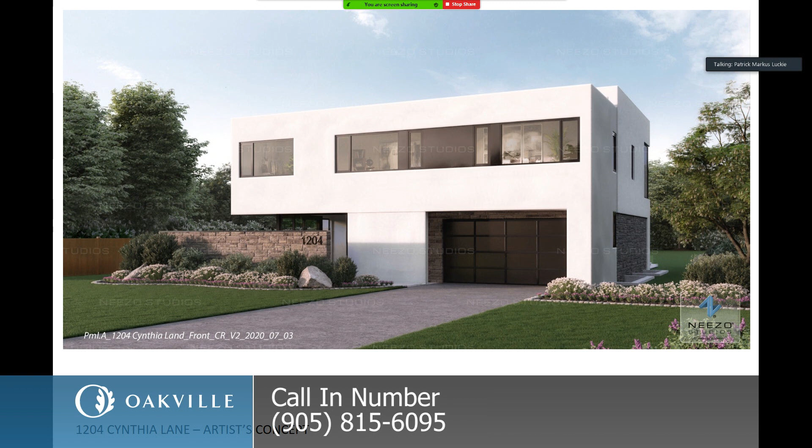This is a very contemporary design, which is a purpose-built project specifically for the property owner, and this design is very similar to the design he had approved back in 2016. It was under a different architect at that time, but we've taken over the project and essentially incorporated some of the same elements from the previous approved design.

If you can go to the next slide - this is just the site plan showing the location. It's a complete rebuild. There's an existing in-ground pool at the backyard that's trying to be retained.

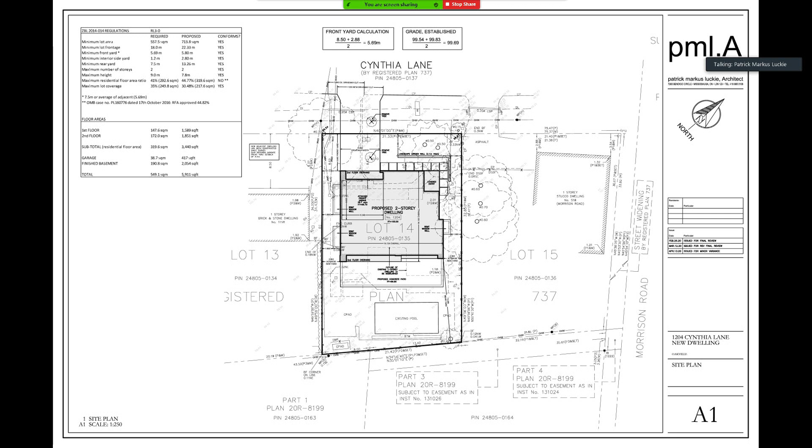Next slide, please. This is an overlay of the 2016 building outline - essentially a very similar shape and footprint. However, we decided to move the building a little bit closer to the front lot line, as the adjacent property to the left on the screen, since the 2016 approval, constructed a new 2-story dwelling closer to the lot line than what they had previously. So given the averages, we were able to move the building a little closer to the front lot line and give a little more relief to the rear yard.

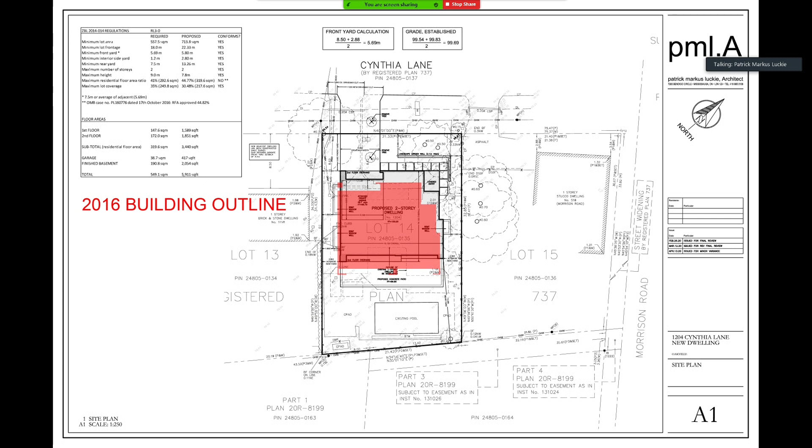Next slide, please. These are just the ground floor plans - this is the proposed one. Next slide, please - and just the 2016 approval. That's the second floor. Next slide, please - and again the 2016 outline, which is almost virtually identical.

Next slide, please. This is the front elevation. The materials are shown as a combination of white stucco and stone. However, the owner, now that we're doing some further investigation, might be looking at doing some aluminum composite panels as opposed to stucco. But the same contemporary kind of white look is his desired taste.

Next slide, please. This is just an overlay of the 2016 building outline. The 2016 design had this kind of strange butterfly roof that sloped towards the back and sloped towards the front - you'll see it in the side elevation. The owners decided to eliminate that concept.

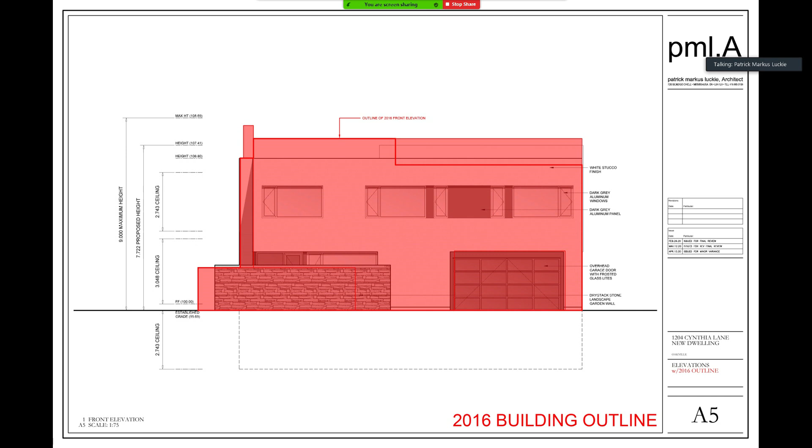Next slide, please. So this is one of the side elevations, just showing the combination of glass, stone, and white stucco or white panels. Next slide, please - and this gives you an idea of that previously approved butterfly roof that has been revised in this application. Still maintains the height well under the maximum 9 meters - we're at 7.7 meters.

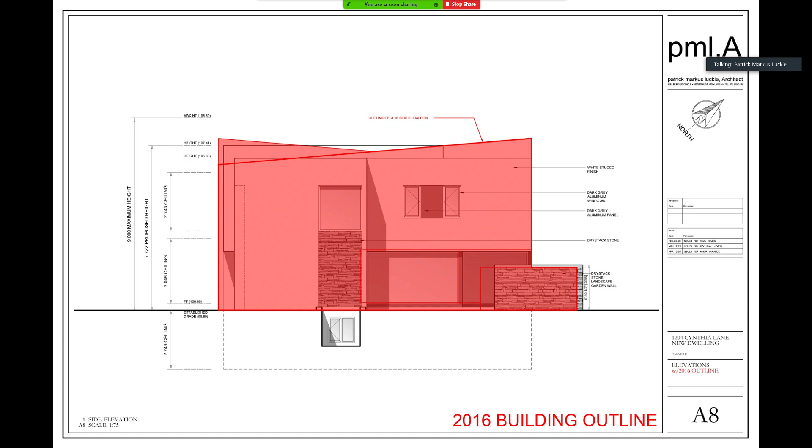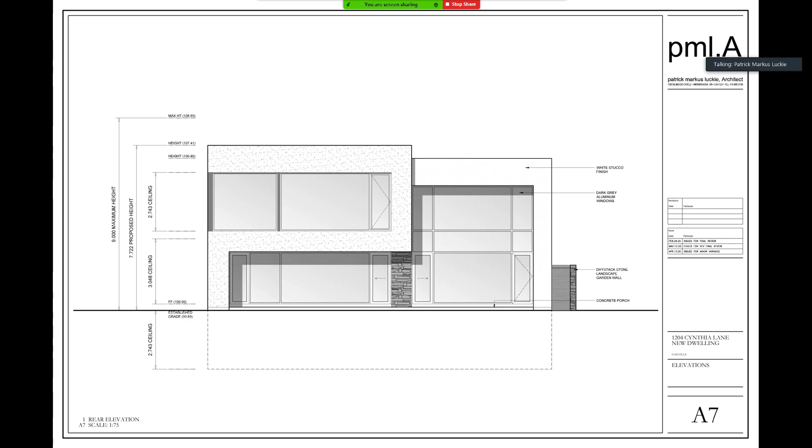Next, please. And then I just continued with the other side elevation. Those are obviously window wells into the basement, which are contained within the prescribed setbacks. Next slide, please - and the rear elevation, which is predominantly glass, overlooking the backyard in-ground pool.

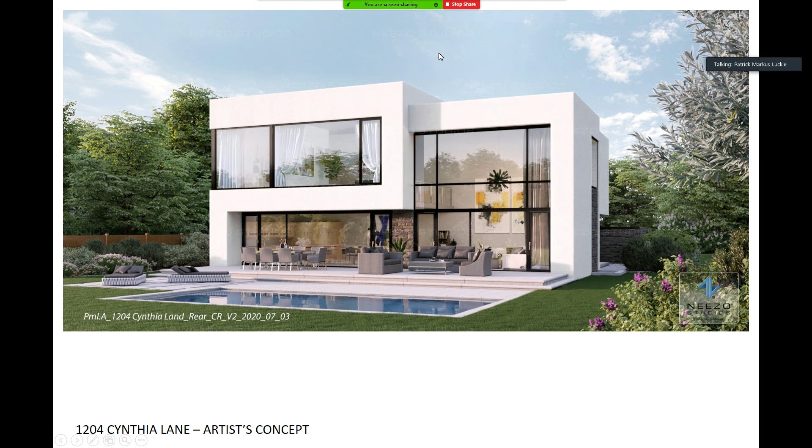So if you could go back to the first slide, that was the three-dimensional of the front elevation. That's it. So the garage is set back a little bit from the main front of the building - the front garage door is set back about 1 to 1.5 meters.

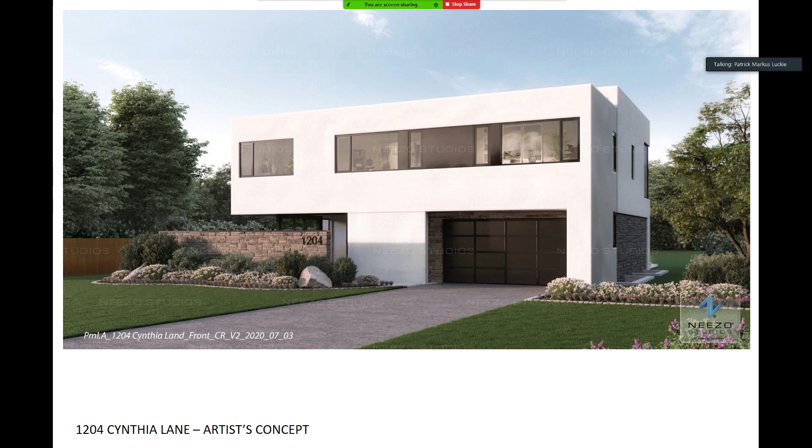And the front setback proposed is 5.8 meters right now, and that's a little bit more than the average of the two adjacent dwellings.

And that's it for my presentation. Thanks.

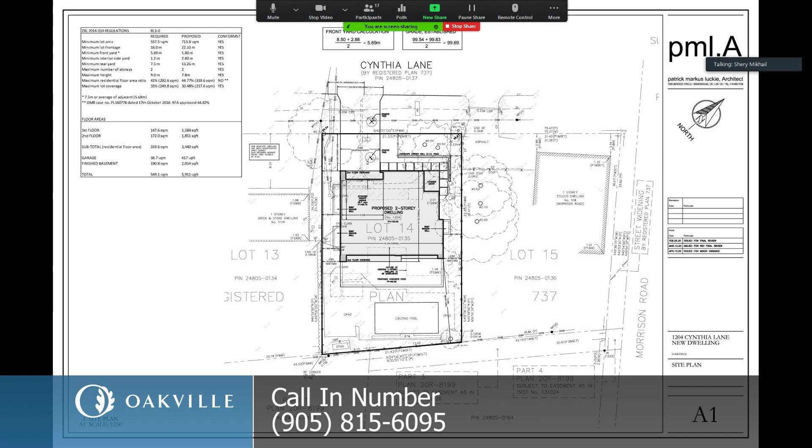Very well, thank you. Members, are there any further questions or items of clarification at this time? Okay, I see none. If we haven't received any calls by now, we can take this matter into committee. Can we just confirm we haven't received any phone calls up to now? Okay, perfect. So if you're satisfied, we're ready to take the matter into committee.

Thank you, Madam Chair. First of all, I'd like to thank the applicant for providing the renderings. I find the style of house particularly helpful, both for the committee and the community, to be able to visualize what's being proposed. Having said that, I'd move that this application be approved as applied for, finding that it meets the 4 tests of the Planning Act. I think it's very consistent with the various styles and sizes of houses being built on Cynthia and Morrison in the immediate area. I would note there's no opposition from the public on this file, and I would make that approval subject to 2 conditions: that development proceed in general accordance with the drawings dated April 13th, 2020, and that a building permit issue within 2 years.

Very well, thank you. Is there a discussion on this recommendation? I see none. All those in support? None opposed. Thank you, your application has been approved. Thank you, have a good night. You as well.

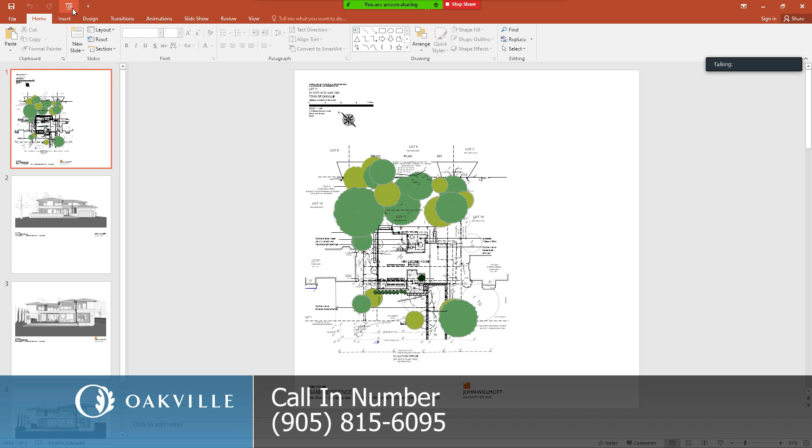Certainly. So basically, we're seeking two variances.

The first variance is for an increase in the residential floor area ratio. We're requesting a ratio of 32.5%, 2.26% of which is to permit the enclosure of an outdoor ground floor one-story patio space with a folding glass door system.

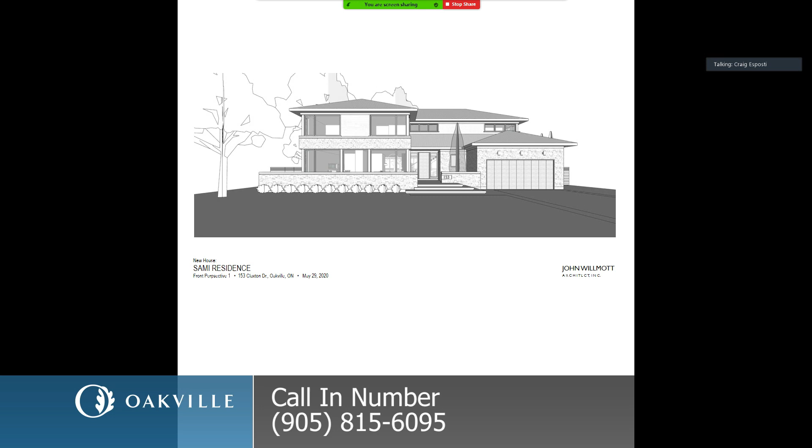If you could go to the next slide, I think it shows in the rear. You can see that it's open with a one-story covered area over the patio. And I believe the next slide should show it closed, so you can see the difference between open and closed, but having little impact either way in terms of coverage or impact on the neighbors, as it's centrally located and largely bound on three sides by the walls of the dwelling, concealing the view from neighboring properties.

The remaining 1.24% is to allow for a modest increase in floor area for desired interior spaces. We made an effort to keep the lot coverage down and keep the setbacks maintained to help mitigate any impact on the neighboring properties. The second variance is for an increase in the garage area.

That's to permit a tandem space, which is generally internal to the dwelling. It's accessed from a two-car garage door from the street and doesn't really contribute to the garage as a dominant feature in any way. We feel that those are minor and appropriate development for the site, and I'd be happy to answer any questions of the committee members.

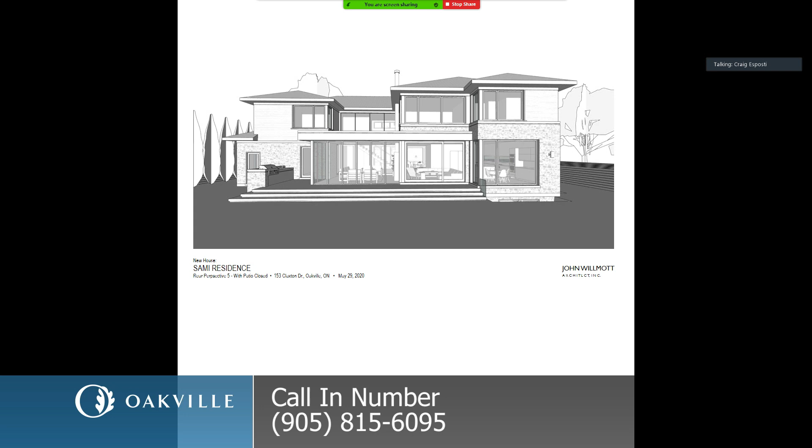Very well. Thank you, Mr. Esposti. Members, are there any items of clarification or questions? Ms. Murray, go ahead.

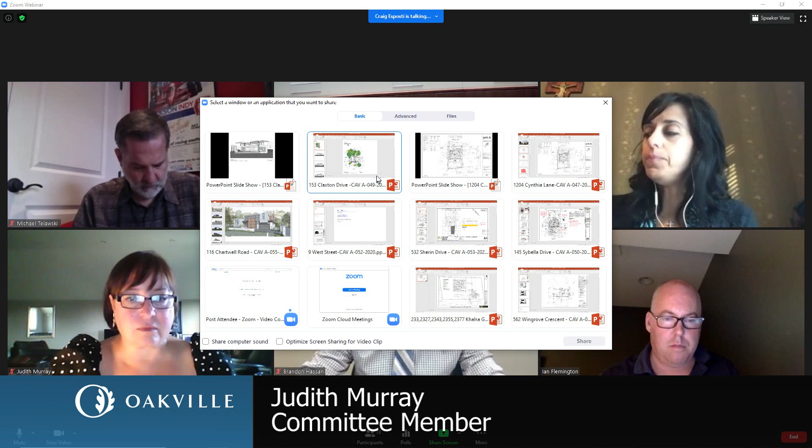Just wondering if we could see a picture of the garage, please, and thank you. Of the garage in floor plan or in elevation? If you can pull the elevation back up, there's the front perspective view, showed it from the street.

Did the previous, there it is. Thank you. It's a two-car garage door, single door.

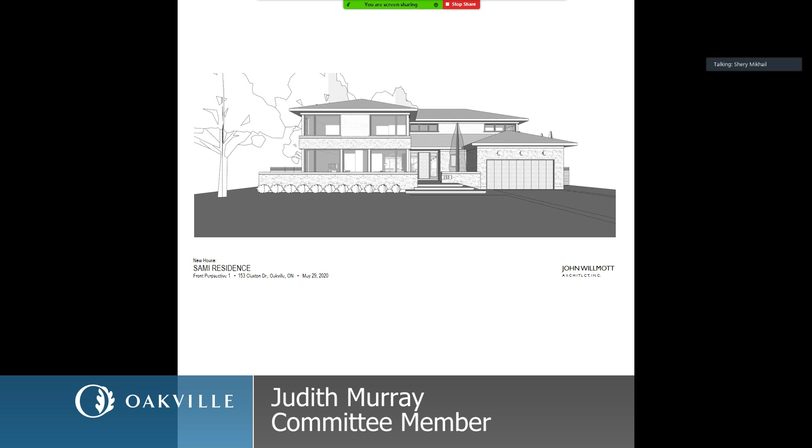Okay, thank you. Any further questions or items of clarification? If we can pull out of the presentation screen so I can see the speakers, thank you.

Any items of clarification or further questions of Mr. Esposti? Okay, I see none. No one has called with a request to speak to this application, correct? Correct, Madam Chair.

Okay, then if Mr. Esposti, if you are satisfied, we can take this matter into committee now. Okay, thank you. Very well. Who would like to move a motion?

Mr. Flemington, go ahead, sir. Madam Chair, having conducted my site visit and reviewing the applicant's written submission, as well as noting that the staff written report was in favor of this application, also noting that there were 3 letters of support of the application and noting that there was no one speaking against it, I would like to move a motion in support of the application as applied for.

And I would like to note 2 conditions. One, that the dwelling be built in general accordance with the submitted site plan and elevation drawings dated May 29th, 2020. And the other standard condition that the approval expires 2 years from the date of the decision if a building permit has not been issued.

Very well, thank you. Is there a discussion on this recommendation? I see none. All those in support? Okay, none opposed. Thank you. Your application has been approved, sir. Great, thank you very much.

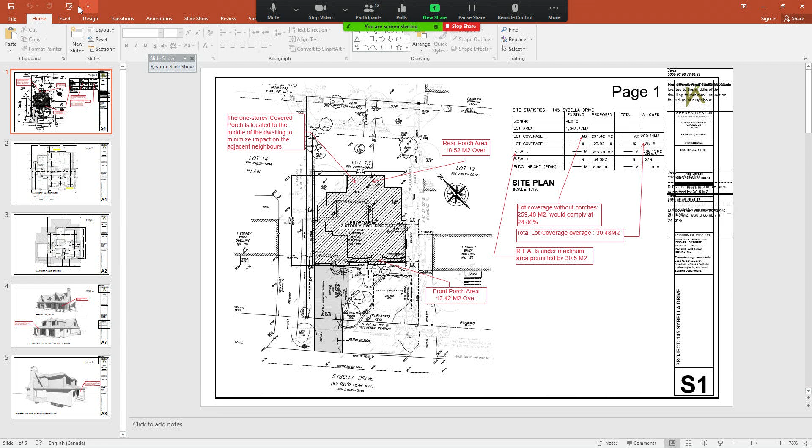If you could start with page 1, please. Yes, thank you. Okay, this is basically to demonstrate that the overage in lot coverage is really attributable to the rear and front covered porches. Without those covered porches, we would actually comply, we would be under the 25% allowable.

Also, just to point out that we did move that rear covered porch to the middle of the building versus its original location, which was to the right, which would have had a little bit more impact on the neighboring property. But now it's been reduced in depth and located closer to the middle of the dwelling in the rear yard. Lastly, just a reminder that the residential floor area is actually under the maximum allowed. Oftentimes with these applications, they have both maxed out and are asking for one to go over, but in this case we're actually under on the floor area and only seeking the variance for the lot coverage for these 2 porches.

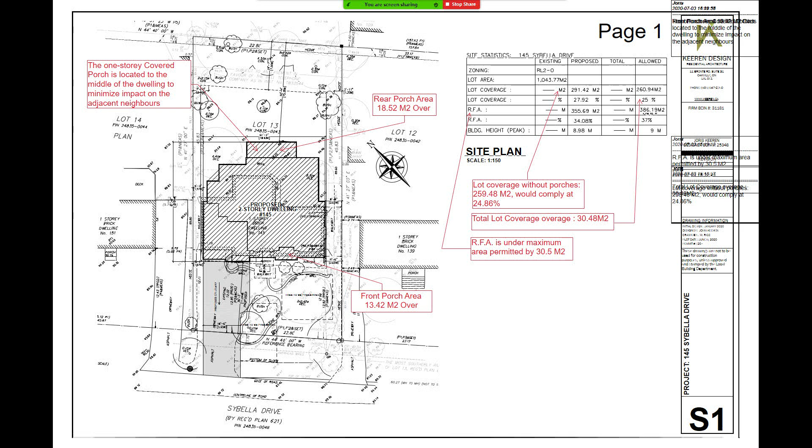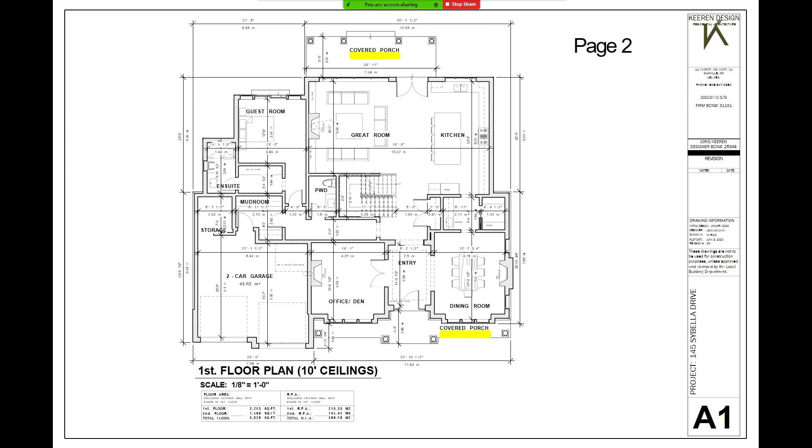Next slide, please. This is just the first floor plan view, again, just indicating 2 porches, it's highlighted. Unfortunately the highlighting has erased the area that was shown there, but it's just a repeat of what was shown on the site plan, the area of those individual porches. Next slide, which is just the second floor. It's not really relevant here, so we'll go to the next slide, page 4.

So this is just a 3D rendering of the house, indicating the 2 areas that we're talking about, front porch, and this is just to demonstrate that these are open structures, single-story open structures, so they are pretty minimal as far as massing goes. Our rendering is there to demonstrate that, and we don't need to see the last slide. That concludes the presentation.

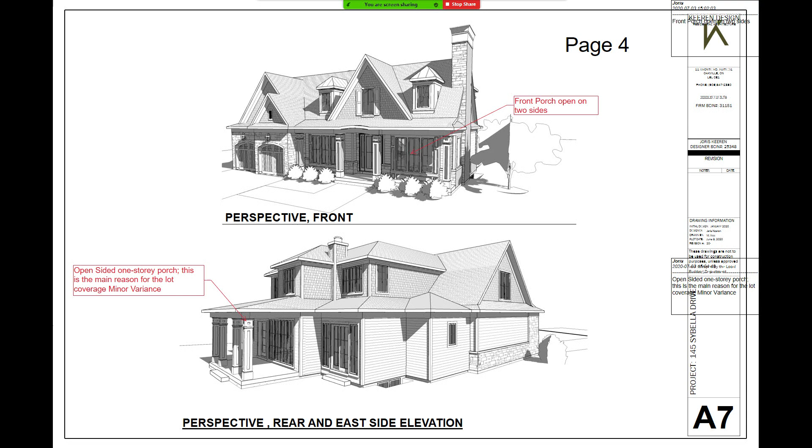Very well, thank you. Are there any items of clarification or questions of Mr. Keeren at this time? Okay, I see none. Yasmina, there's no one who has called in for this application, correct? Correct. Okay, so Mr. Keeren, if you're satisfied, we can take the matter into committee. Yep. Go ahead, Mr. Telawski, thank you. Thank you, Madam Chair, I don't think there's anyone left to call in. The applicant's done an excellent job of getting the support of the whole committee by the looks of it.

Having said that, Madam Chair, I would note the subject letters of support, and that the area subject to the variance, not only are they single-story open elements, but the single-story eave treatment is carried through much of this house to the reduced second floor, so I don't believe there'll be any impact of the variance. So I would move approval of this application as applied for, finding it meets the four tests of the Planning Act. Make that approval subject to construction in general accordance with the drawings dated June 9th, 2020, and that a building permit issue within 2 years.

Very well, thank you, Mr. Telawski. Is there a discussion on this recommendation? I see none. All those in support? None opposed. Your application has been approved. Thank you, thank you.

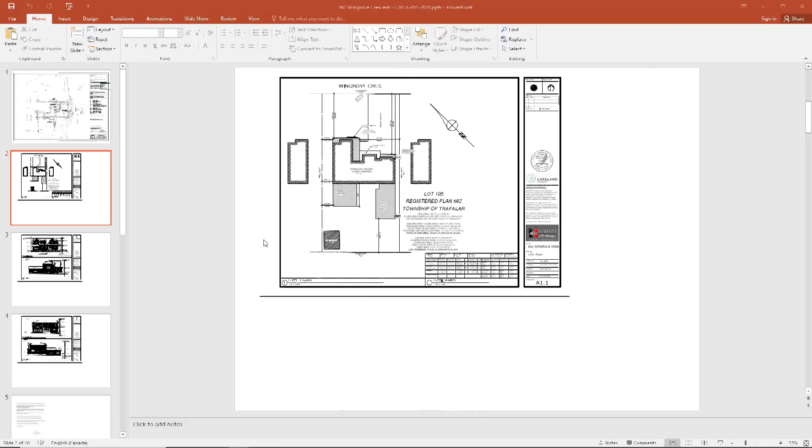There we go. Nope, this is not it either. I sent in a 5-page document. It had my remarks as the first page, a shot of the original site plan as the second. There we go, that's what I'm talking about.

So next page. There we go, that's the original site plan that was used to apply for this variance. It's from a sunroom company, clearly not a legal survey. So they had the side yard setback existing as 0.82 meters, which was incorrect. A new legal survey was prepared.

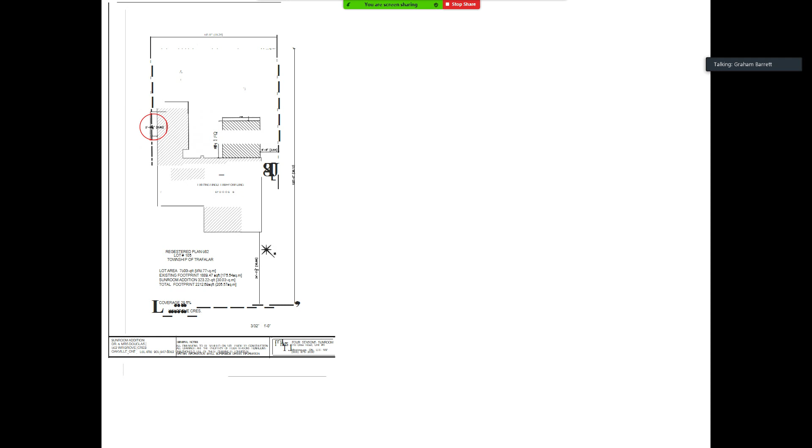If you go to the next page, please. That's a cutaway of the current legal survey. That is the same setback, it's 0.73 meters. So the variance was misidentified the first time around.

There are no changes to the original proposal other than correcting this side yard setback. I've confirmed with staff that there's no need to get the garage area variance reapproved as it's already been approved. This is still minor in nature. I believe it still passes the 4 tests. The owners have spoken to their adjacent neighbors, informed them of the mistake, and obtained fresh letters of support from both. They've been submitted, but are also included in this document on pages 4, 5, and 6.

The owners would very much like to rectify this and continue their building process. And if anything, this is a lesson that even though a legal survey may not be required for a minor variance application in Oakville, it is certainly a good idea to use one when preparing a site plan. So that's all, thanks for your time. Very well, thank you.

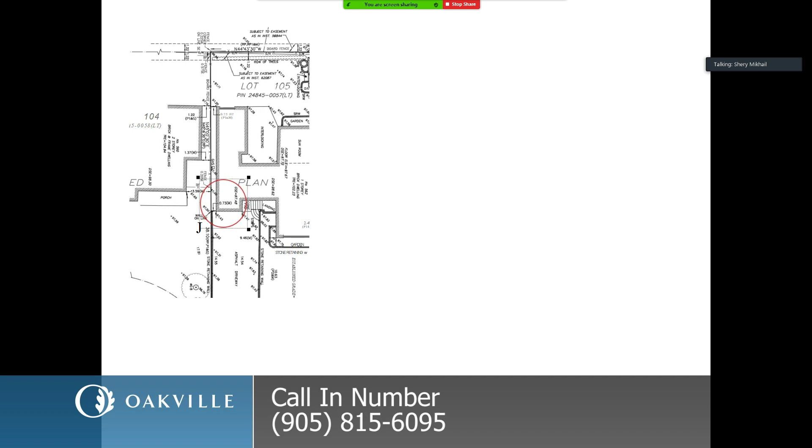Members, are there any questions of Mr. Barrett at this time or items of clarification? Go ahead, Ms. Murray. Thank you. Sorry, just a quick question. Sometimes our materials don't print all that well or show up. We have letters of support from 560 Wingrove, and from 568 Wingrove, and 564.

Is that correct? No, I believe they're both from 560. It's Megan and Lane Gardner. They just both, as members of the household, signed letters of support for their neighbors. So it's 560 and 564. So both adjacent. Thank you.

Any further questions? I see none. Mr. Barrett, there hasn't been anyone who's called in for this application, correct?

Correct, Madam Chair. Okay, so then we are ready to take the matter into committee if you're satisfied. Okay, go ahead, Mr. Flemington.

Thank you, Madam Chair. Having conducted my site visit and noting that there were letters of support for the application from two of the neighbors, as well as noting that staff's written report is in support of the application, and noting the presentation, thanking the applicant for clarifying the error made previously, I would like to move a motion in favor of the application as applied for, with the conditions that the addition be built in general accordance with the submitted site plan and elevation drawings, plot dated January 31st, 2020, and the standard condition that approval expires 2 years from the decision date if a building permit has not been issued for the proposed construction.

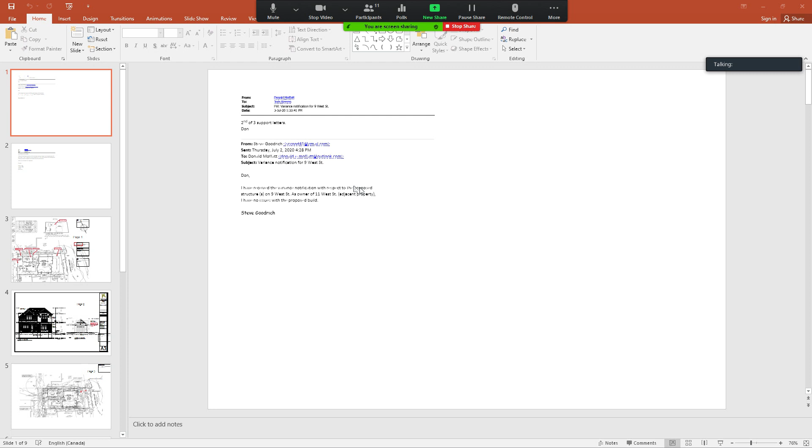I'm looking for, it's a letter, titled Summary of Key Points. It's one of the PDFs I sent in. Might be the last one, Yasmina. If it's not available, I can just read it. It's not a problem.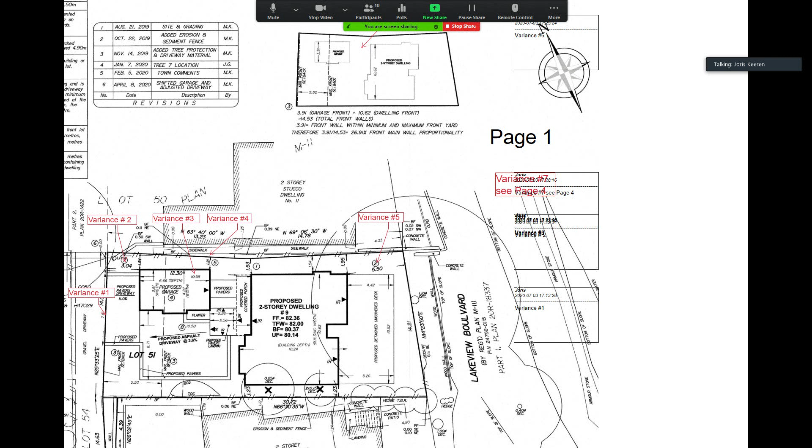Okay, so just going through all the variances. There's seven in total, so just to clarify for everybody, we've labeled them.

Variance 1 refers to the driveway width. What would be allowed on this property with this frontage is 6.83 meters, and we're asking for slightly more at 7.01. Again, it's just because of the unique nature of this property. We need to create access for the garage itself, and then access into the little parking area in front of the dwelling. We had two separate driveways proposed initially, but planning preferred this scenario, so that's what we went with, and that created this variance.

Variance 2 refers to the front yard setback associated with the detached garage. That is 3.04 meters, whereas 5.7 is required. However, the existing garage that's there now is about 1 meter away from the front yard setback. So this is one of the areas we're improving on as far as the location of the building.

Variance 3 has to do with the garage projection. It's obvious this is a bit of a unique situation, with the detached garage in the front creating this overage of 10.58 meters.

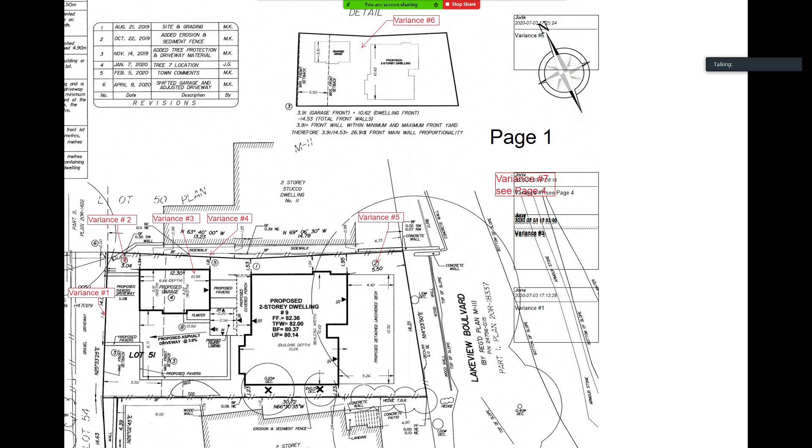So just very simply indicating the variance for the heights, which has to do with the architectural integrity of that building. We feel it looks a lot better with a slightly steeper roof, and it looks more in keeping with the main dwelling as well.

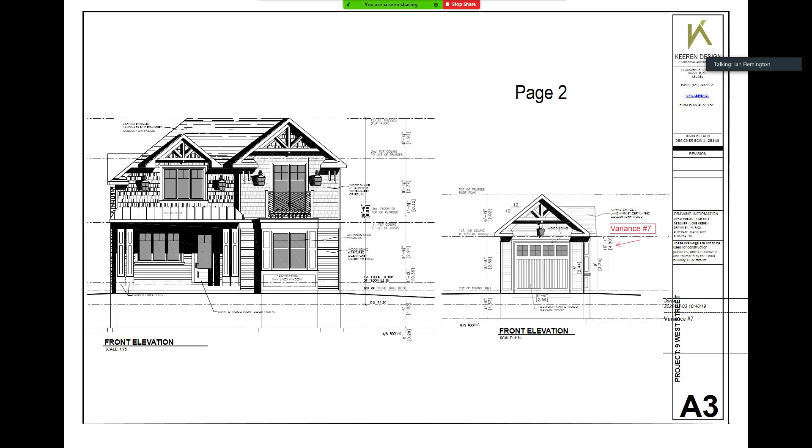Now we'll go to page 3. I had some highlighting, but I guess that didn't come through. You can see in the faded lines the existing structure, and that's where you can see the front of the garage is a lot closer to the front lot line, 1 meter. In the rear, we've highlighted that 4.12 meters is the existing rear yard setback, just to demonstrate that we are improving that as well.

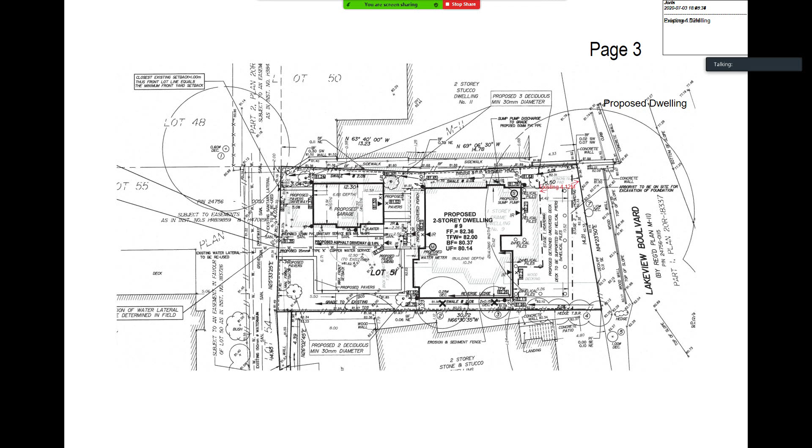And we'll go to page 4. Didn't come through, but that's the side of the garage, and then the west side of the dwelling.

Let's just go to the last page, 5. And that is the rear, and you can see a little bit clearer the 1.5 story, or basically the 1-story component of the building, which is about half the building. Half the dwelling is 1 story but with vaulted ceilings, that's where the windows are above those doors. It's not a second floor, it's just vaulting.

That concludes my presentation. I'm happy to answer any questions if there are any.

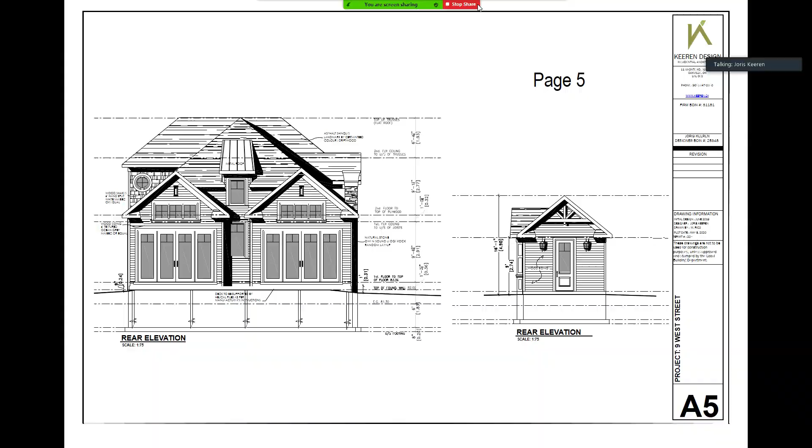Very well, thank you for your submission. Are there any questions or items of clarification from Mr. Keeren at this time? Ms. Murray, go ahead.

Actually, it's a question for town staff. I'm hoping they can answer this. How would emergency services arrive at this home and maneuver with the diminished side yard setback? I realize it's a unique property, very unique, but I'm just trying to understand how that would work. Through Madam Chair, since this property is located adjacent to Lake Ontario, fire department staff do comment on the site plan application. However, I'd have to pull up what their comments were. They didn't have any concerns with the variance. So in terms of circulation for emergency purposes, I don't have the direct answer, but I can certainly look it up quickly.

Does the committee like to proceed?

Thanks a bunch. Yeah, I can offer some clarification on that as well, if that's an option. So the property is on a laneway, as you've probably seen, and that laneway acts as a small road.

The only setback that would affect, I think, emergency vehicle access would be the one that we're improving, which is the front yard setback of the detached garage. I don't think there would be a turnaround opportunity for any kind of emergency vehicle, but I think it's enough for them to get in there. And again, it's a situation that we're improving over the existing condition. There's another house that's further.

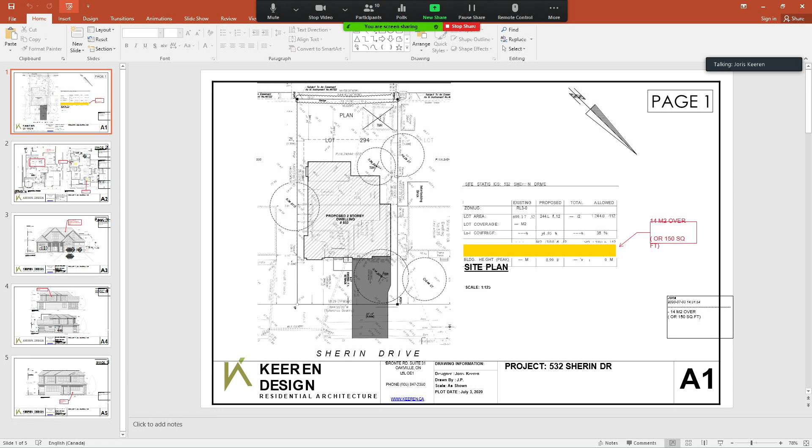We did reach out to most of the neighbors, as did the applicant. I was told there were a few letters of support coming, but they never materialized. But what I can tell you is that all the immediate neighbors have been informed of what's going on, and the discussions have been had. So just wanted to mention that.

So this is the site plan. My highlighting seems to be coming out a little different than what it is on my end, but we're just highlighting the residential floor area overage. So we're about 14 square meters over what's permitted, which translates into about 150 square feet. I'll go to the next slide, please.

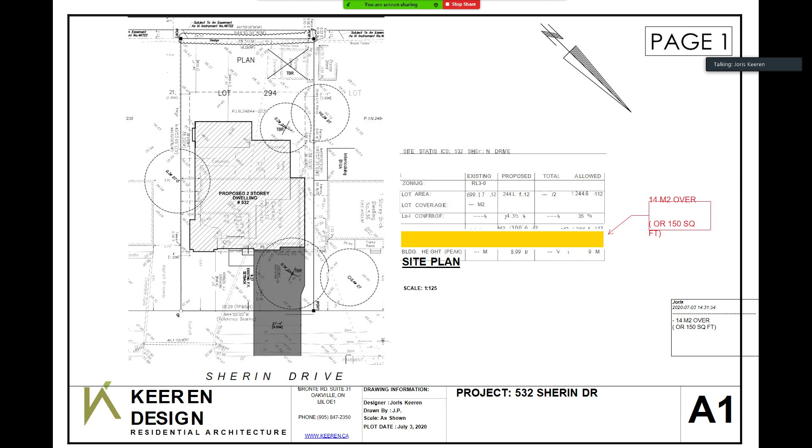What we've done here, just to clarify where that extra square footage is living: 5 square meters is spread through the kitchen and breakfast area for the extra space that was wanted there. On the second floor, the master dressing room needed more space, and we also wanted to provide for a second floor laundry room. You can see the square meters allotted approximately for each of those areas.

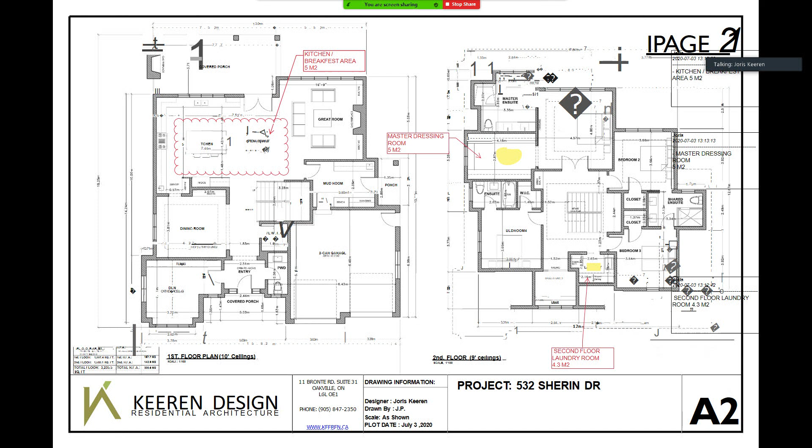Go to the next slide, please. And never mind the question marks appearing, those aren't part of the design, not sure why they're showing up.

The location of the laundry room, I just wanted to point out, is actually within the roof line, so it's not really an element that's adding any massing. And that concludes the presentation.

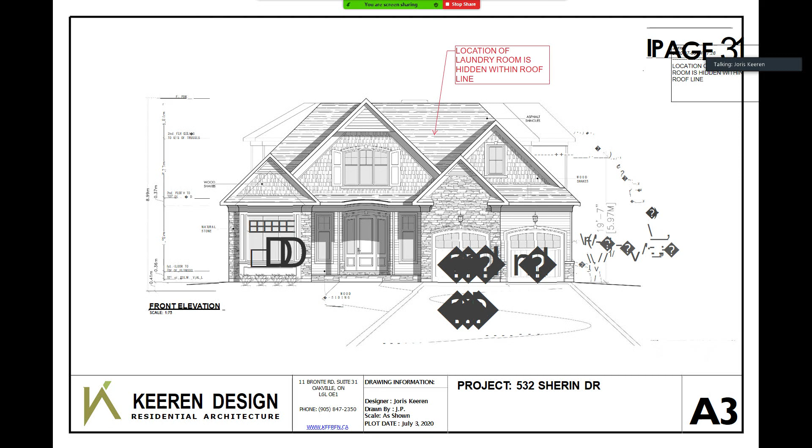Very well. Are there any questions or items of clarification for Mr. Keeren for this application? I see none, and I don't believe anyone has called in, correct? Correct, Madam Chair.

Okay, so if no one has called in, we're ready to take the matter into committee. Go ahead, Ms. Murray, thank you.

Thank you, Madam Chair. Having conducted my site visit, reviewed the applicant's written submission as well as the town's written staff report, which I note the staff is in support of, and I thank Mr. Keeren for his presentation. I also note that there appear to be no written objections. However, Mr. Keeren has indicated that they've canvassed the neighborhood and find it supportive of the application.

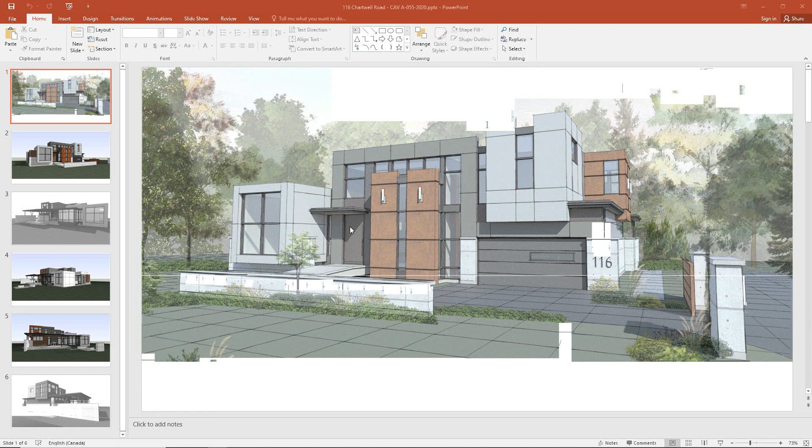Okay, so we're here today requesting your consideration on 4 variances. One second, you just... Okay, sorry, it just covered my speech that I was reading.

The subject property is a trapezoidal shaped lot, narrowing towards the rear right corner. As you can see from city mapping, the property sits in the foreground of 126 Chartwell Road. It's surrounded on the right and rear side, while the property to the left is approximately the same length, except it's wide at the front and then narrows along the second half of the property, forcing the house at the front far closer to the street.

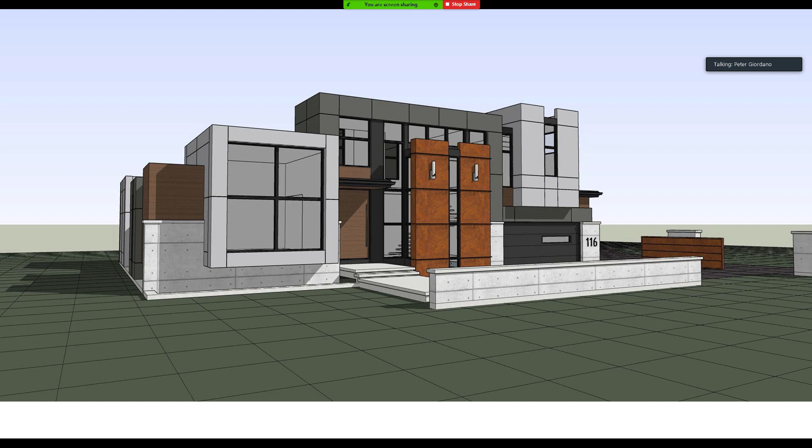The house at 134 Chartwell relates to our property in a streetscape perspective with a slightly staggering presence. These two facts are important aspects to our variance request. Can you display image number 6, please?

So the home itself is positioned... the required new home is required to be 1 meter forward or back from the location of the existing structure to be demolished. The existing home is set back a distance of 30.24 meters from the front property line. We are requesting the home to be located at 25.59 meters from the front yard setback.

This will position the house far better in relation to both exposed neighbors, the neighbors to the left and to the right, excluding the immediate neighbor at 126 Chartwell, as his home sits effectively in the rear yard of 134 Chartwell, the immediate adjacent property to the right. Items number 2 and 3 on the variance list are related.

Our client had asked for a privacy wall to be built in the rear right corner of the house. This wall would be best described as a 3/4 high wall, about 6.5 feet high on the pool side and about 8 feet high to grade on the neighbor side, open above by about 5 feet, as you see in the image on screen, with 2 simple angled metal posts supporting the flat roof.

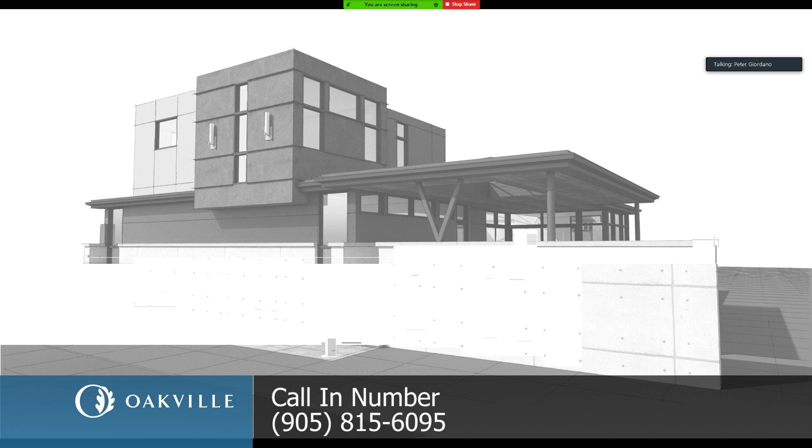Can you go to image number 5, please?

That's the view from the rear, which shows the low wall, the screen wall, to the right side of the house. That screen wall creates a pinch point on the right side. The trapezoidal shape of the property starts to angle and comes close to the screen wall, which creates the side yard setback of 3.08 meters. That's at the very end of the privacy wall. That minimum side yard setback is not taken to the house, it's taken to that side wall. Then if you can go back to image number 1, please.

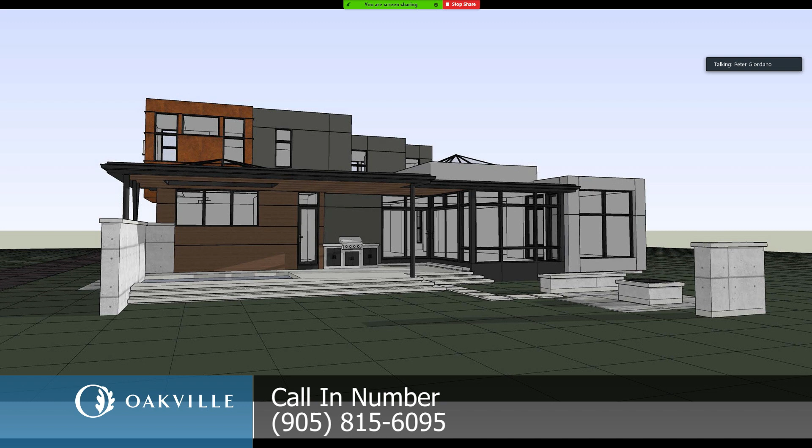The last variance we're asking for is an increase in garage area. That's the one right there, please. The garage is a 2-car plus 1 with a tandem bay. The increase in size does not impact the massing of the house as it otherwise complies with coverage and the floor area ratio bylaw.

Our client worked diligently to approach and attempt to speak to the 9 homes closest to him. He spoke personally to 3 neighbors who were all positive and had no objections. He had email contact with 2 more who also had no objections, and he left 2 letters inviting them to call him but received no follow-up. The neighboring home immediately to the left is empty and will more than likely be for sale soon. But of course, we do have a letter of support from 126 Chartwell, the neighbor immediately to the right and fully encompassing the right side and rear of the subject property.

Planning staff have no objections to the application. They explained our situation quite well in their staff comments, and as such, we believe our variance passes the 4 tests of Section 45 of the Planning Act.

Well, are there any questions or items of clarification of Mr. Giordano? I see none. Okay, and I don't think anyone has called in for this application thus far. There were no calls up to now.